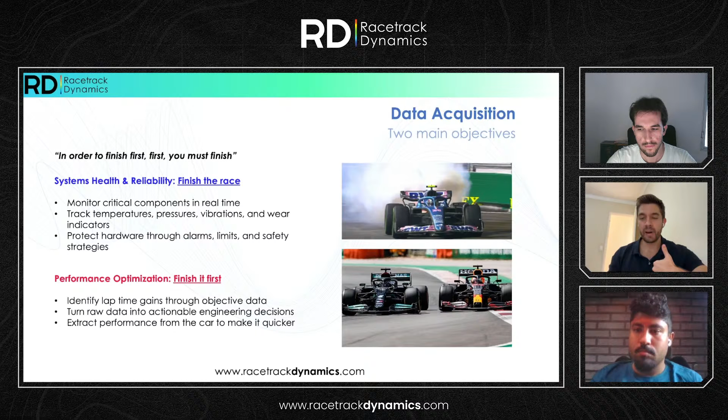The second part of the job is, okay, you're going to bring the car home. Now you need to bring it home, but you need to bring it first. So this is what it's all about. It's about optimizing lap time. It's about making the car faster. It's about identifying car balance issues, driver limitations, everything that is preventing the car from going faster. How do we do that? We do that by receiving data from the car.

How do we receive data from the car? We rely on the process of instrumenting the car with sensors to measure how it behaves mechanically, dynamically, and even thermally. So we put a lot of sensors in our car, and they're going to give us the information we need to take actions on the car. So this is including not only the installation, but also the calibration of the sensors and making sure that they will be working in the appropriate windows, and they will be delivering appropriate results and appropriate data that is useful for us.

Only with this data, we can analyze performance, validate setup directions, and actually make the car faster. But we all hear the word telemetry, we all think that data acquisition is all about telemetry, but live telemetry only exists in some categories like F1. Usually, I'm sure Igor can quote me on this one, for the vast majority of categories, the data doesn't go live, so you need to actually run to the car, plug your laptop to the cable, and try to offload all the data that you have stored during the session. So this telemetry thing is only a type of data acquisition, which runs live, and you can make decisions and look at things on the go, right, Igor?

Yeah, it's a very stressing moment. Sometimes you have to do some minor changes at the car, or you're having a problem. You have to optimize a session, and you have to download the data from the car to investigate everything. And a lot of times, the hardware doesn't cooperate, and you have a bit of lag, and sometimes the data come corrupted. It's things that happened. You learn how to deal with it with time and how things work on the pit box. But it's a concern that you always must have, because we don't have telemetry. You have to download the data from the car and make sure that it will be recorded in the next session. Some kind of devices, you even have to start them, so you have to be very aware of that.

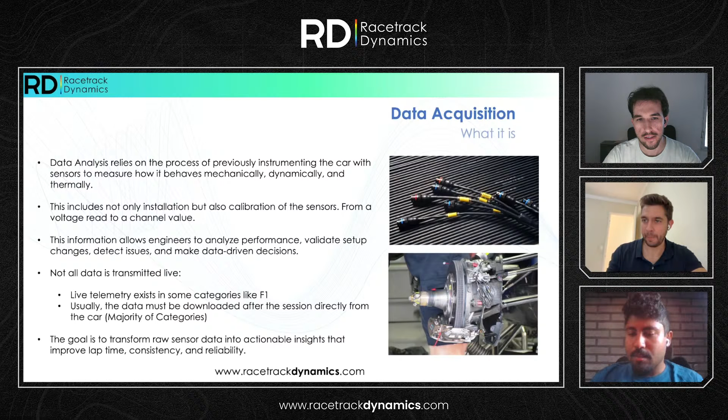All right, so now let's talk about the different sensors that we have. We're gonna talk about what I consider the key sensors, which are the sensors that are essential, that should be present in all categories. So we're gonna have a throttle position sensor, here marked in blue, which is essentially a position sensor that gives the information of the amount of throttle we are using, between 0 and 100%. We're gonna have a brake pressure sensor connected to the braking lines, for the front line and for the rear line. Remember that in most motorsport applications, we have a parallel or H configuration, not a cross line. So we'll have one for the front, one for the rear.

So that will give us a read on the pressure that we have on the braking lines, and that can give us information about how our driver is applying the brakes, when he's doing that, if it's too early or too late, the modulation that he does to the corner as he enters the trail braking zone, and the peak force that he builds. It can also help us with understanding the efficiency in braking and identifying any possible car issues, like brakes running too hot, or air in the system.

Then there's going to be the steering wheel angle sensor here in green, which is essentially this little, I don't know what to call it actually, Alex. This little hole which is going to be inserted into the steering wheel is going to give us the read on the steering wheel angle at all times on the track. So this is one of the most critical sensors. Why? Because most of the balance of the car can be read through the steering wheel angle, and this is what we need to evaluate balance. So it's going to give us information about the driver's steering inputs, if he's using too much because there is maybe some front limitation going on. If there are corrections needed, we're going to get information about the rate of the steering wheel angle that we use, and many other very important information.

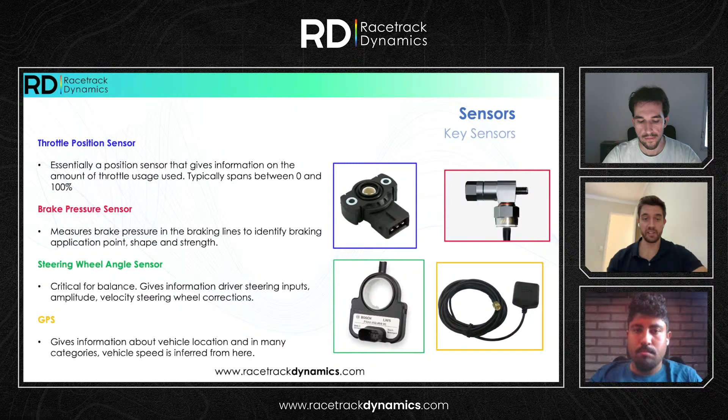And then we got the GPS, which is giving us information about the vehicle location, and in many categories it is used to infer the vehicle speed of the car, where speed over ground sensors are not present, or we're not doing these maths to find the velocity of the wheels and the gears. It gives us the information of the vehicle speed as well.

Then there are some nice to have sensors, which in order of priority for me, one is the damper potentiometer. We also call it damper pot or POTI. It's a linear position sensor, which is going to be mounted either on the spring or damper to give us an indication on how much our elastic elements are moving and deflecting.

So we can have a clear read on the suspension health, and body movements, oscillation of the body, bottoming, topping out, or even excessive travel. So this is one of the key ones for me. Of course, this information can be very helpful if we're trying to refine our model and we're doing correlation further on. So this is a must at all times.

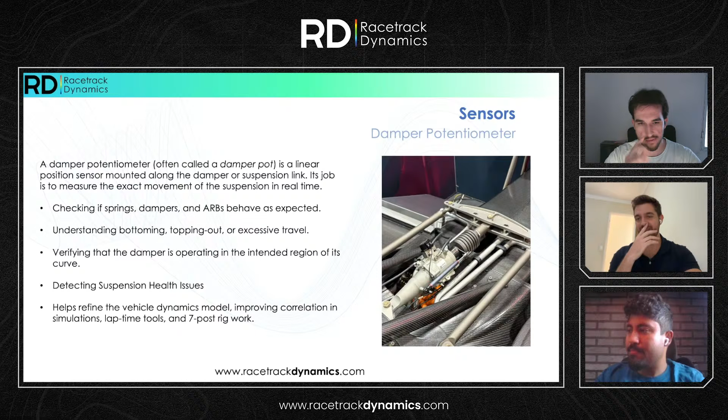Can you believe, Igor, I would not know what to look at if I didn't have those. I would really not know where to start. Yeah, that's the problem when you have a lot of sensors, you don't know how to improvise. For me, it's always been about, okay, whatever I want to know about the car, it's there. There is a sensor that exists. Otherwise, there is a mathematical calculation that, based on other sensors, is inferring this channel for me. So it's a very different reality for me. It's something I'm really not used to.

Yeah. So that's why it's good to have you here as well with us. A zip tie on the damper shaft is a very good damper position sensor. All right.

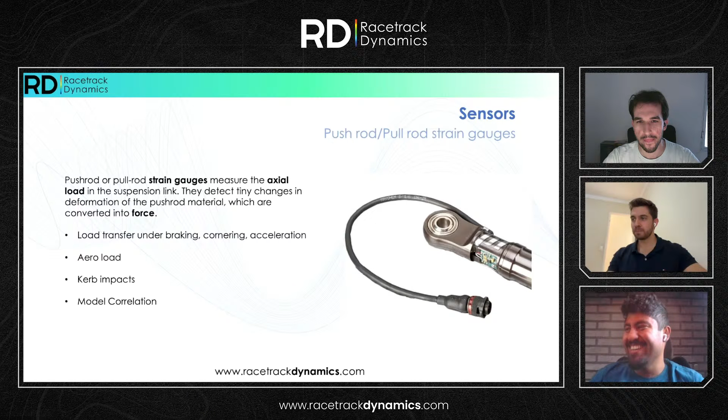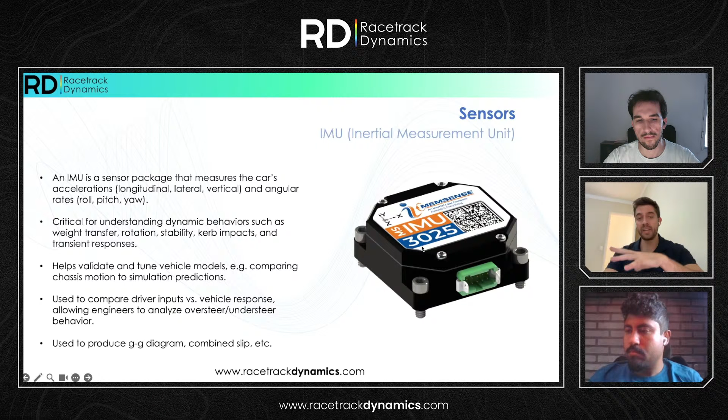So this is critical for us to derive more sophisticated channels, to understand things like, for example, the understeer oversteer angle that we will talk about in a minute. It's critical for us to derive information about the tires, as we will need yaw rates, for example, side slips, all that. So this is going to help us a lot to validate and tune our vehicle models. And yeah, essentially we need these accelerations from the car. We use it every time.

And next, we're going to move to something a little bit more hands-on, for which I believe you all have received an email and have been instructed on what's going to happen for this half of the webinar. I'm going to pass it to Igor, who, as we presented him, has fantastic experience in many different categories, and he's going to be a great guy to present this little interactive section of the workshop. So exactly. Take it away, Igor.

If you did not install the MoTeC software and you try to install the workbook, it won't do anything, okay? So first install MoTeC and then install the workbook. Once you do that, once again, open workspace and double click here. I have another session open here, so I will just close the data so I can show you guys, but once it opens, it will be like this. It should open with this face. This is what you guys will see in your screen.

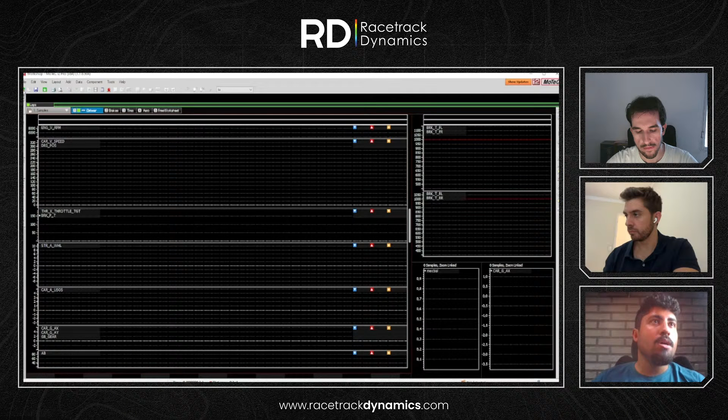So it's a lot of channels here, a lot of graphs, but they will be empty because now we have to pull up the data from the car. This is just the workspace. The workspace is exactly this we are seeing here right now. So to pull up the data, you come here into this open log file, the little folder here with the plus sign, and you go where you downloaded the data, where you extracted the data from the zip file. And let's start with the one named Barcelona.

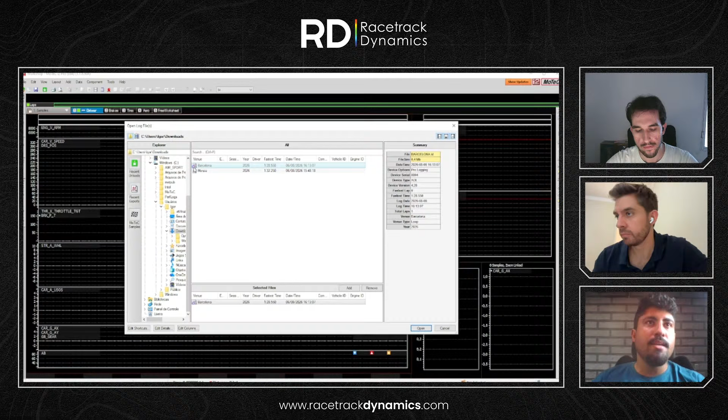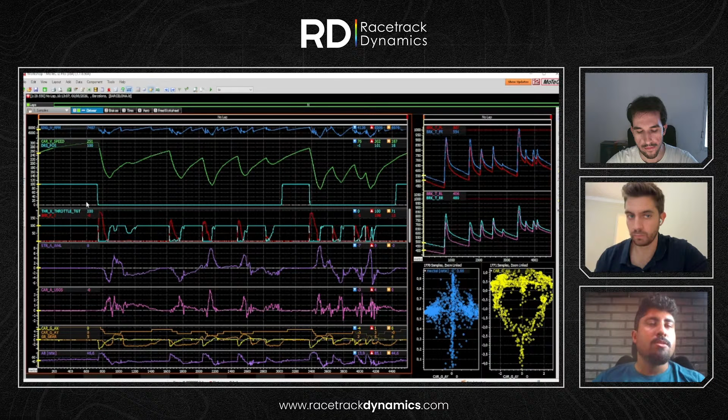I can open both of them at the same time, but I will start with only one. So double click it. It will have this plus sign here. It's selected to be added, and you click open. Once you click open, this is what you guys must see. So we have a lot of channels here right now. So let's just check if everyone's following up. So we basically open MoTeC, open the workbook, and now open the data.

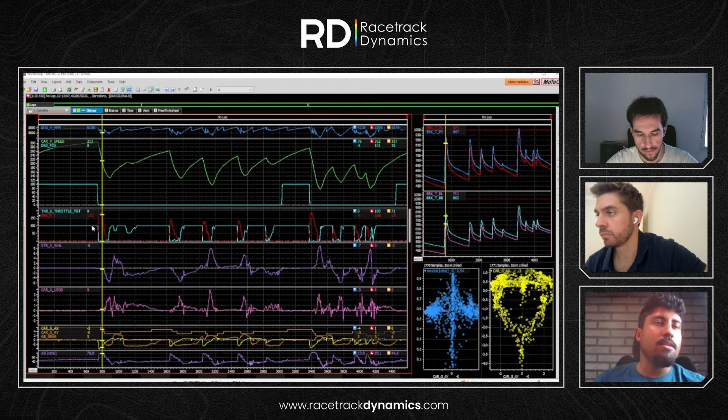So we have engine RPM as our first channel here, the car speed, the green one. Then the next one is DRS position. This already tells us something about the car. The next one we have throttle and brake. They are compiled here, the brake being the red one and the throttle being the blue one, the lightish blue. Next channel we have here is the steering wheel angle. The next one, the pink one, is the car A USOS, like we said, the understeer oversteer channel, the calculated one.

And the last ones here, in the same graph, we have car longitudinal acceleration, car lateral acceleration, and gear position. As I told you guys, you can see here that gear is like a stair. It has this stair format because gears are only round numbers. We have first, second, third, so it just skips to the next gear. That's why we have this different shape here. And the last one here is aero balance.

This aero balance already tells us something about the car, which we will discuss a little bit later. But these are the main channels here in the driver tab. And on the right, we have brake temperatures. Here, front brake temperatures. Here, we have the rear brake temperatures. You can see by the name that the red one is front left, the blue one is front right, and so forth for the rear.

And a good thing here, Igor, is that we were able to create our warning signs. We could also create alarms, but in this case, we just put a horizontal line, which is a trigger for us to know that we're exceeding the maximum operating temperature of the brakes and that we should take care or action if that happens on the track. You could also have visual alarms, but

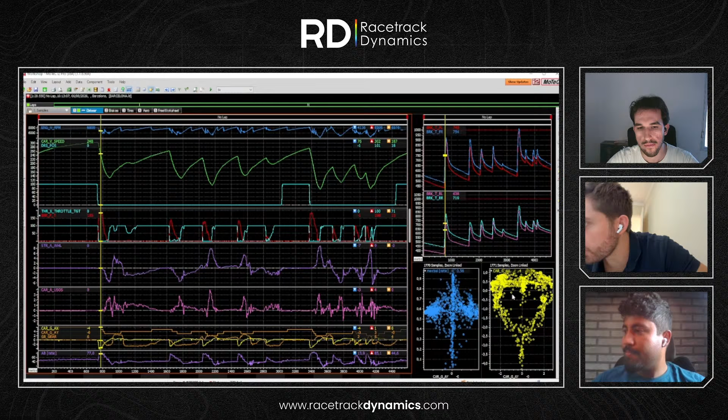And the last ones here we have basically... Go ahead. Sorry, Igor, did you comment about the mech bal with lateral acceleration? I was answering a little bit in the chat. Oh, I'm going to talk about them right now. Right.

Here we have basically mech bal. I will explain to you guys what it is. And here we have the lateral and longitudinal acceleration combined. So this is basically an area that the car creates from all accelerations it went through. If it brakes, it generates a negative acceleration, there will be a dot here. It made a turn, it created lateral acceleration, so we have a dot here for that. And this is basically what some people like to call the performance envelope of the car. The bigger this area is, the more capable your car is because it's making more acceleration, lateral or longitudinal, it doesn't matter. You want to make this one bigger.

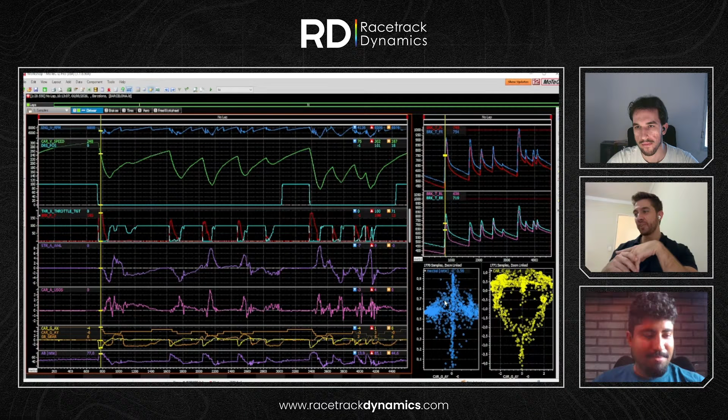And mech bal basically is a calculation of the balance of the car. So you have the grip in the front axle and the grip in the rear axle, and with that you can calculate how much of this grip is in the front axle. Here we have the mech bal calculated as a ratio for the front axle. So you can see here about 57% of the grip of the car is in the front axle. It's a little bit counterintuitive, because it seems like a forward number gives more grip to the front axle, but what we're looking at here is a weight transfer delta between the front and the total. So it's this ratio which matters.

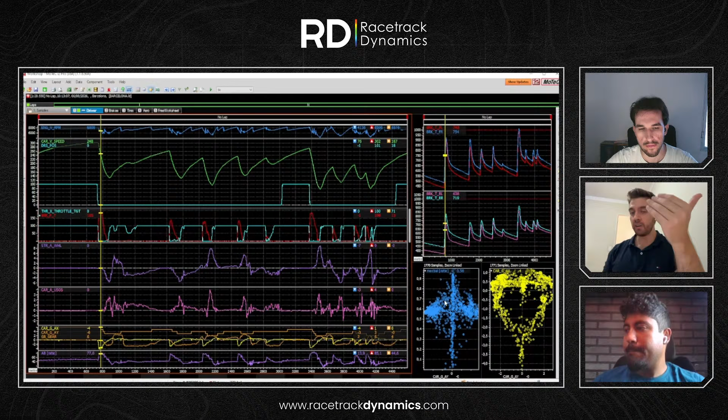If you follow our course, you will learn about tire load sensitivity and how load transfer is something that kills grip on the axle, the overall axle capacity. So more weight transfer to that axle means that the axle is less efficient. So what this is telling us is that a forwards mechanical balance has more weight transfer in the front axle relative to the rear, which means the car is more front limited. It has a more capable rear end, so it has more grip in the rear than in the front via weight transfer mechanisms.

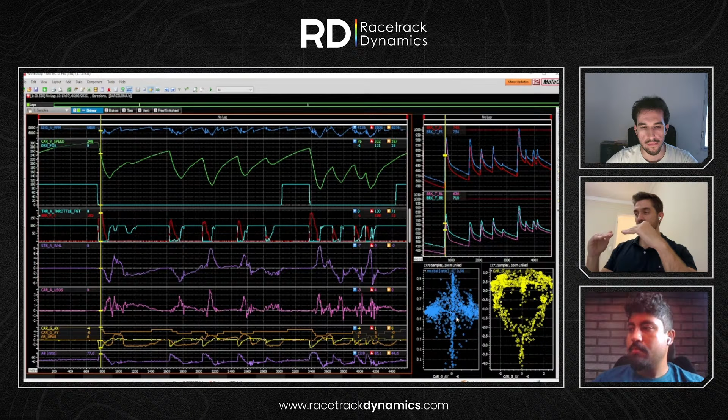This is a really cool chart because this mech bal is giving us an indication of the symmetry of the car, whether my car is mechanically in the same place when it takes left hand corners and right hand corners. So if Igor can point to these two arms, we have one arm that is sitting lower than the other. In this case, if my right arm is higher than my left arm, it means that effectively my mech bal is forwards in right hand corners, and it is rearwards in left hand corners.

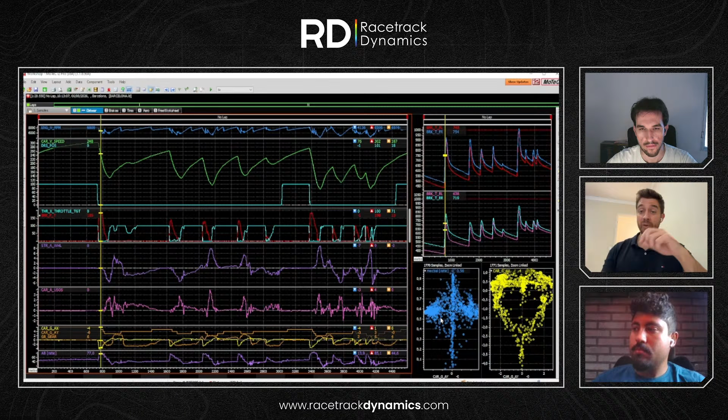So what this means is that my mechanical balance is changing depending on the direction that I turn, which is an indication that something is wrong with your suspension system. Something is wrong, you have cross weights, which is making this asymmetric mechanical balance. So this is a very good suspension health check and balance check. Of course, this can be affected by the track profile. If the track is very warpy, it can somehow affect it, but as a first check, it is really useful. Now, Igor, you want to move on to next tabs?

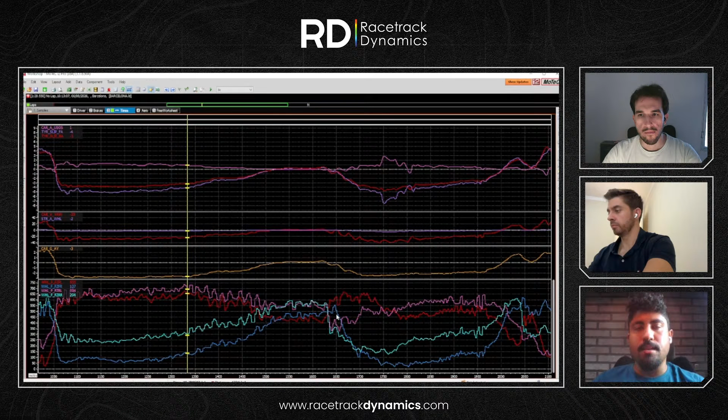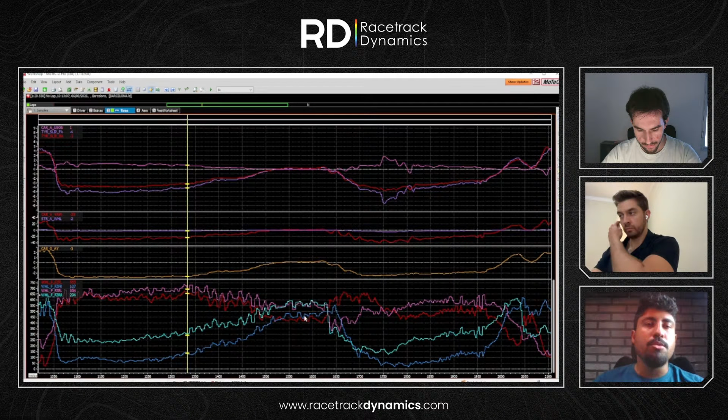But just to explain a little bit for you guys, very quick here. All these little inputs here are basically the tire bouncing because they are in a very high frequency, and because of that, we can see that this is basically being dictated by the tire. And when we have a bigger movement, like you're seeing here in this blue graph, this is a slower movement, and because of this, you can notice that it is a body movement of the car. And we can analyze this to filter through the signal of these channels, and it helps us to set the dampers and the springs of the car. But I will not go too deep in this because it's a very deep analysis, just as a curiosity for you guys.

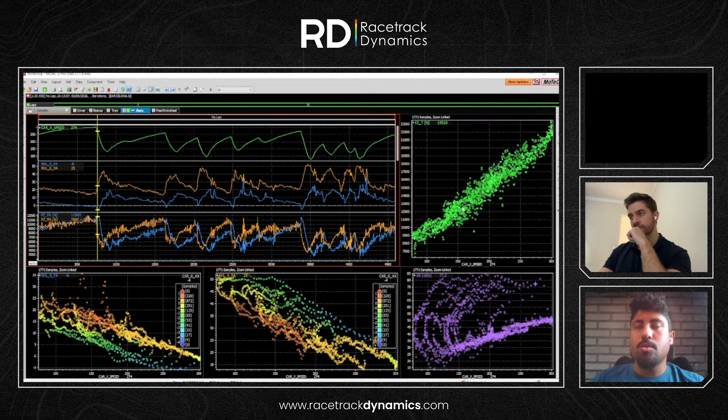But if we look here in the vertical load in the front axle, the blue one, you can see that it increases as we expected, because of the braking, because of the movement of the body of the car. But then it starts to decrease because the downforce starts to become less because of speed.

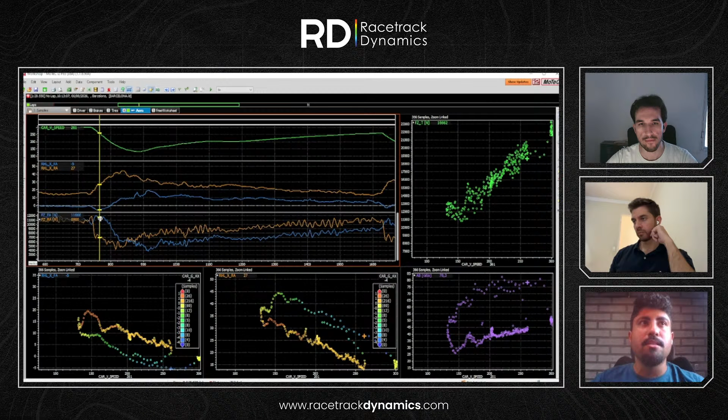Okay, so this is a curiosity, so you guys can see that you can't trust everything that your eyes are seeing, because of course you have to understand the physics behind it. So we have weight transfer to the front, as you can see here, it increases, but then the speed starts to drop, and of course the car has less downforce.

Okay, this is the first exercise we wanted to do with you guys, and the second one is basically to show you guys what a math channel is and how it works. So Alex, yes, thank you.

I'm presenting. It has a little bit of delay. Yeah. There it is. There it is.

Okay. So, talk about wheel lift. Once again, wheel lift refers to the phenomenon where the inside wheel loses contact with the ground. From a full vehicle performance point of view, this is detrimental. Of course, if your tire is not touching the asphalt, the only thing that makes your car move forward, backwards, or whatever direction you want is not touching the ground, so it can't move. You don't want a wheel lift. So because of that, we want to search for wheel lift.

Can you spot any wheel lift in the data? And what channel did you use to look at it? We already have the answer for the channel here in the screen. So if you guys want to look at it in your workbook, we just go to the tires tab, and we will have the vertical forces here. And if you guys can tell me in the chat which wheel we are seeing wheel lift.

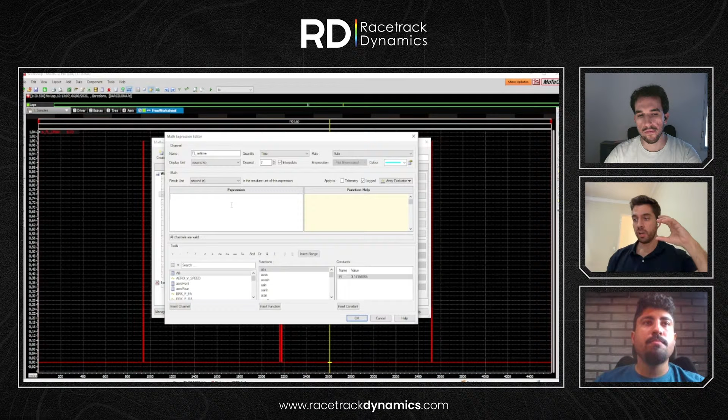So then we have this Boolean that is working, that is triggered when there is vertical force in the tire less than 10 newtons, which is our condition for wheel lift in this case. It can be whatever you want. Now what we're gonna do is, we see these spikes on the data, which is this trigger derived from Igor, and now we're going to integrate this across the lap and see what is the actual cumulative lift time of our wheel, if we give a metric.

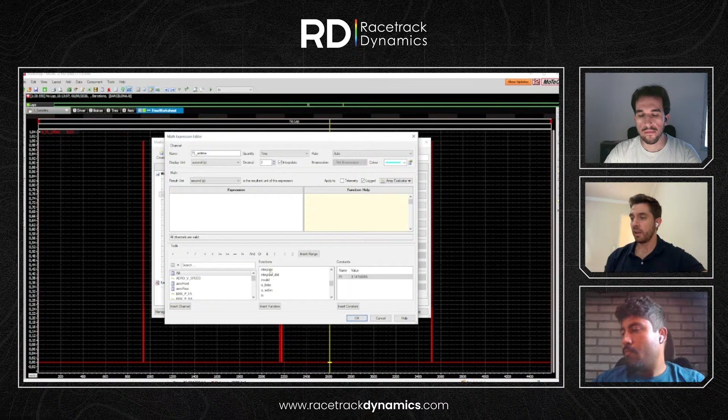So imagine the driver is complaining, car balance is wrong, something is wrong. You see there is performance improvement that you can do. So then you do a setup change and then you go again. And how do you quantify that your airtime has reduced? How do you quantify that now it is bigger or smaller? How do you put a number on that? So now we're going to do an integration across the lap. We're going to give a cumulative time of the amount of time that the wheel is lifted during the lap. So this is what we're gonna do now.

So in order to do that, as Igor is doing, the expression that we will need is going to be integrate, right, Igor? Yes, because as you can see here, integration of data over time. So this function basically does what we want. So we double click it, and once again we have some brief explanation here and how the function works. And I can give it just a parameter, a parameter and a condition, or a parameter, a condition, and a reset value. So I can reset this every lap, for example.

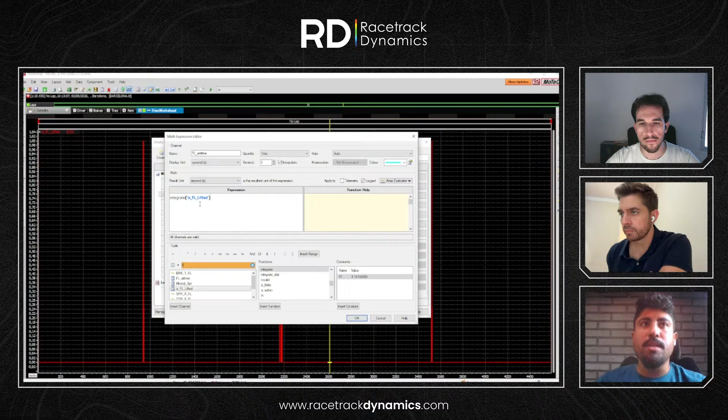So I go to the channel I've just created. I search for it here. So we have here, is front left lifted, which is the Boolean we created. Double click it. And the only thing I need to know is when this one is true, I want to integrate the time that it is true. So I don't need to give it a condition, a reset time, or anything like that. Just this function already tells me all the time that this one is happening. Okay. So with that, I just click OK, and the math channel is created.

And once again, we're going to add it here together with the front left lifted. So right click on it, properties. I will create another group, because if I don't create another group and just add the channel here, they will be mixed up, but I want them to be separated. So I will create another group, and in this group 2, I will add the channel that I just created. So front left airtime, I double click it.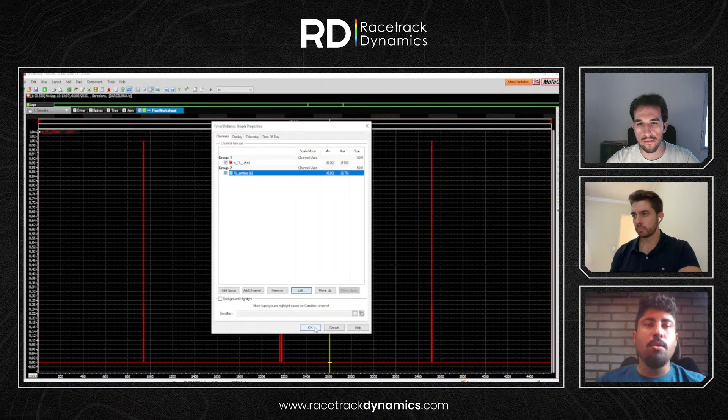So now we have in the group 1 the front left lifted, in the group 2 the front left airtime. Click OK. Then we have both of them, and we can see here we have a cumulative counter of how much time my wheel is not touching the ground. And just as a visual reference for you guys, let's add here too, right click, properties, another group, and I will add here the channel for the front left vertical force, just so we can see that it is counting correctly.

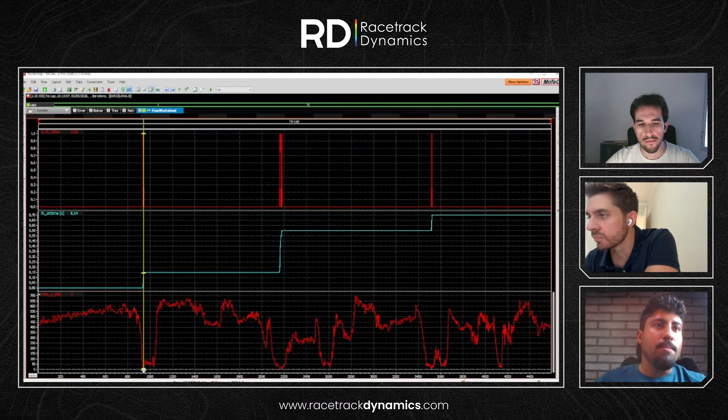So I'll search for the FZ channel, front left FZ, and OK. You can see that it counted exactly where it comes close to 0. Once again, we come very, very close to 0, it counted again. Very, very close to 0, we counted again. But it's much easier to look at these two graphs here in the top than this one in the bottom and keep looking for wheel lift. This one is a lot more visual.

So now you can make comparisons between laps. You can compare. Okay, in this one I had 7/10 of wheel lift, and then here I have 3/10 of wheel lift. You have a number at the end of the lap that you can come to and see, to have a quantitative understanding of this phenomenon.

Now, thank you very much, Igor, for the demonstration. Alex, if you have capacity, please bring up the presentation. Yep, you've got it now. Yep, thank you very much. And thanks again, Igor, for this great explanation.

Quick recap. We created the is front left lifted with a choose, and then we do just a cumulative time of that with the integrate function, and we end up exactly with what Igor has presented. Thank you very much, Igor.

Great job. Thanks, Javi. So, Alex, I will give it to you now, actually. Cool. Actually, Javi, I wanted you to give some words on this one, because data is really one of the things that we're asked the most about, and it's one of the things that people know less about, right? Everyone knows what aerodynamics is, but becoming a race engineer or performance engineer, it's a bit more obscure. Wouldn't you say, Javi? Isn't that a thing we hear very often?

Yeah, agreed. And again, it's not about learning how to use Microsoft Word, but knowing how to write a book, right? Learning how to use Microsoft Word doesn't make you a writer. This is what I always say. Yeah, exactly. And it is one of the most common questions we get. It's one of those where you don't really know what you're doing until you actually do it live or you learn from someone who's done it. It's very difficult to learn. You can't really learn these kinds of skills by reading a book, the same way I'm sure you can learn Navier Stokes by doing that.